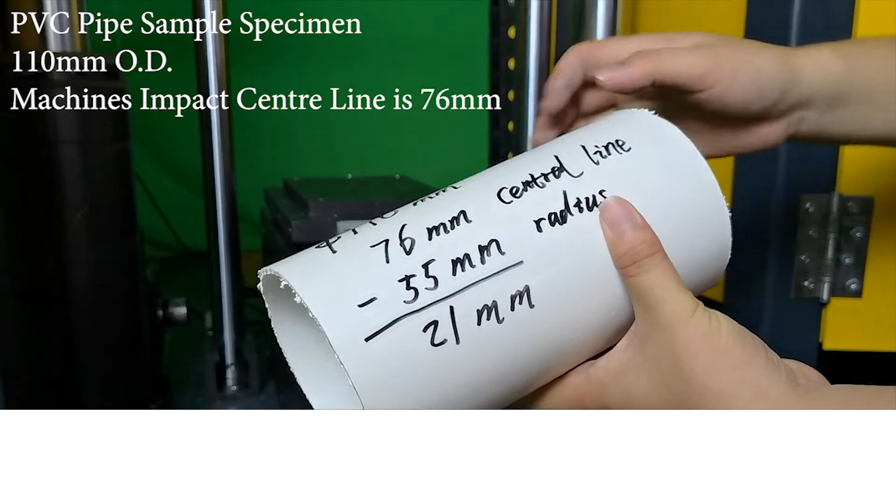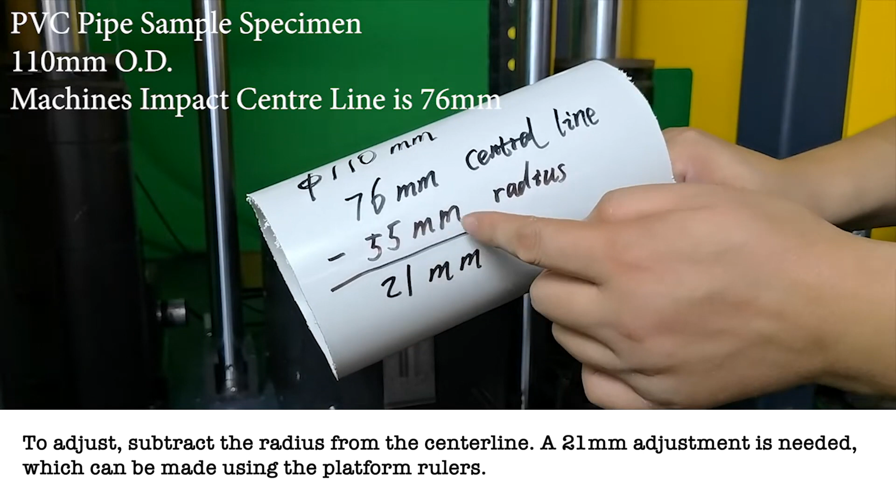PVC pipe sample specimen, outer diameter, 110 millimeters. The machine's impact center line is set at 76 millimeters. To adjust, subtract the radius from the center line. A 21 millimeter adjustment is needed, which can be made using the platform rulers.

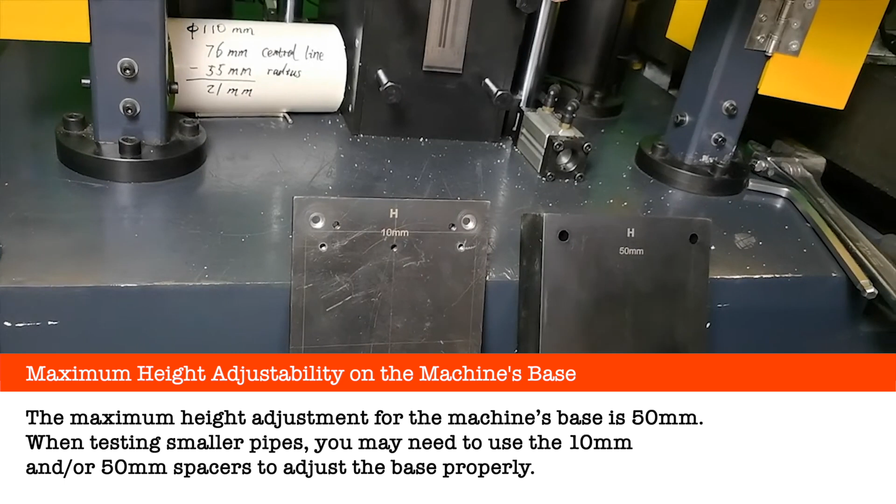Maximum height adjustability on the machine's base. The maximum height adjustment for the machine's base is 50 millimeters. When testing smaller pipes, you may need to use the 10 millimeter and/or 50 millimeter spacers to adjust the base properly. Base adjustment. Adjust the bolts to raise or lower the base.

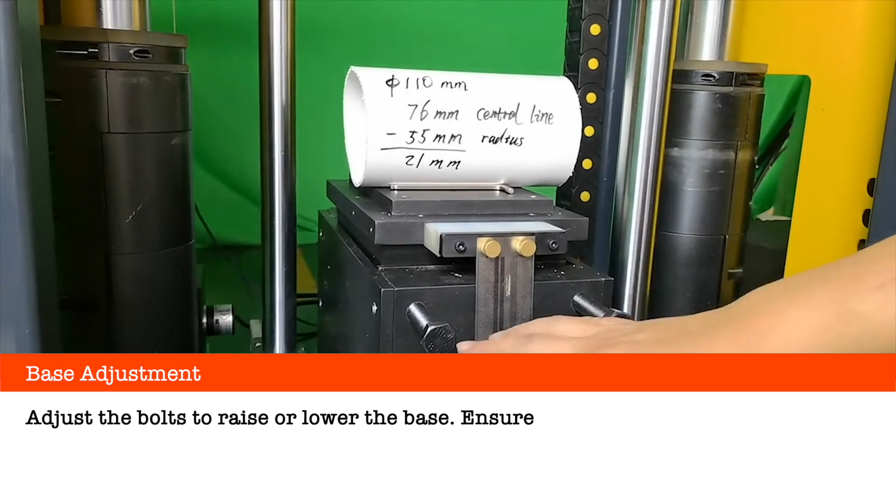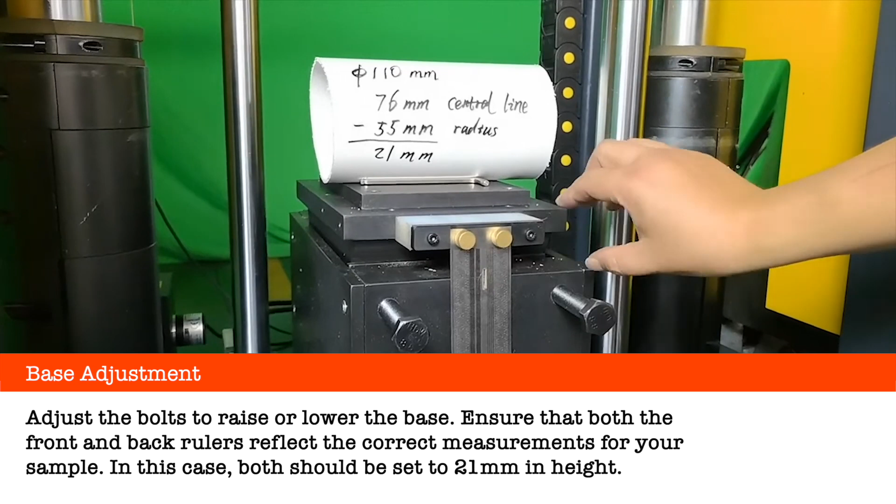Ensure that both the front and back rulers reflect the correct measurements for your sample. In this case, both should be set to 21 millimeters in height. Impact hammers and corresponding anvils. Various impact hammers are available, each with a corresponding support anvil.

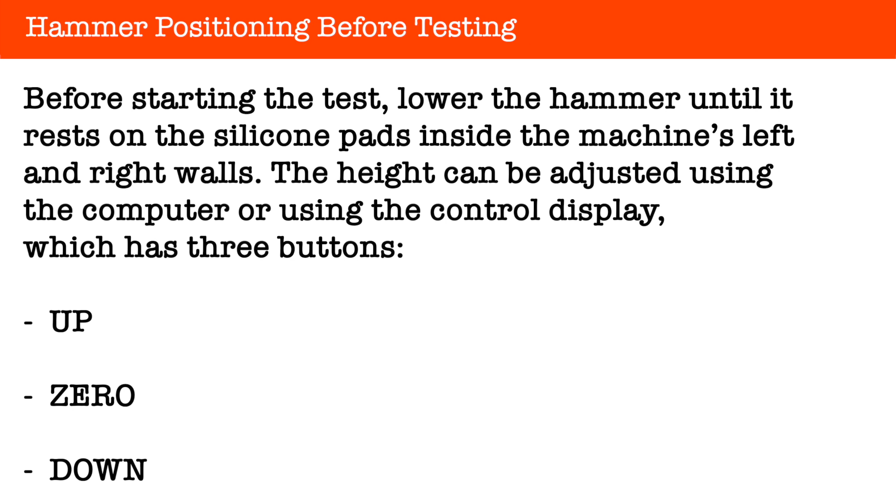Hammer positioning before testing. Before starting the test, lower the hammer until it rests on the silicone pads inside the machine's left and right walls. The height can be adjusted using the computer or using the control display, which has 3 buttons, up, 0 and down. Lower the hammer until it rests on the silicone pads.

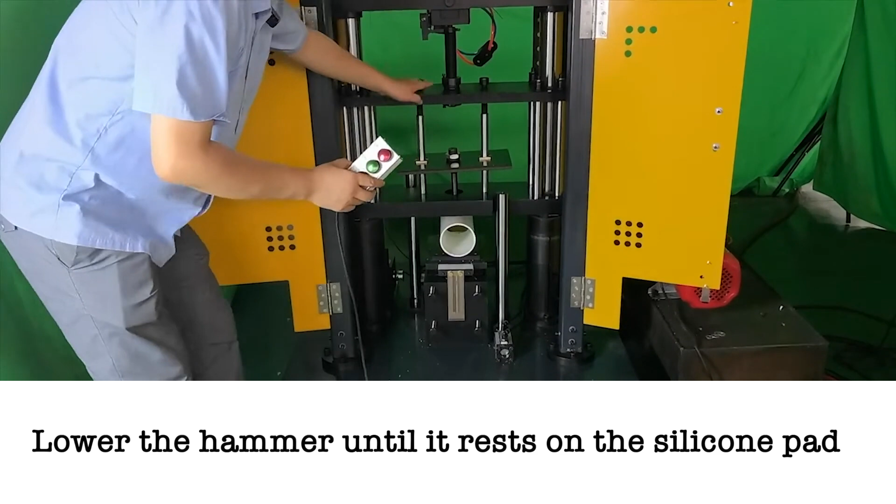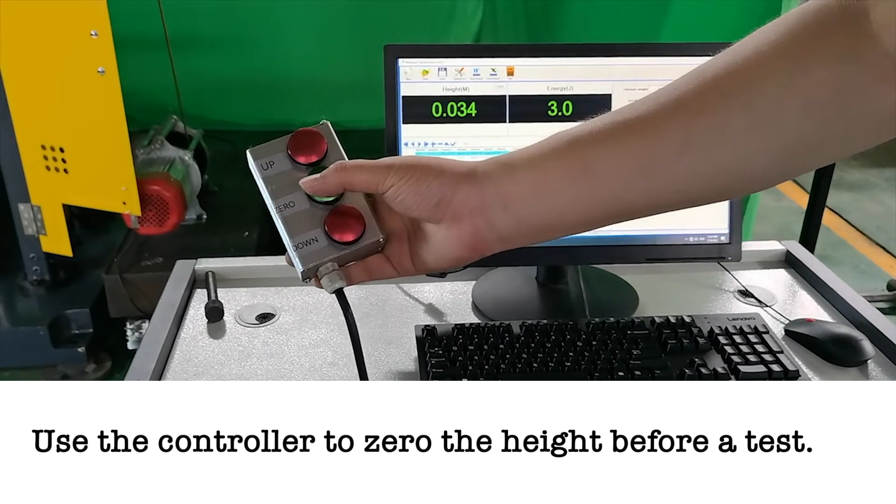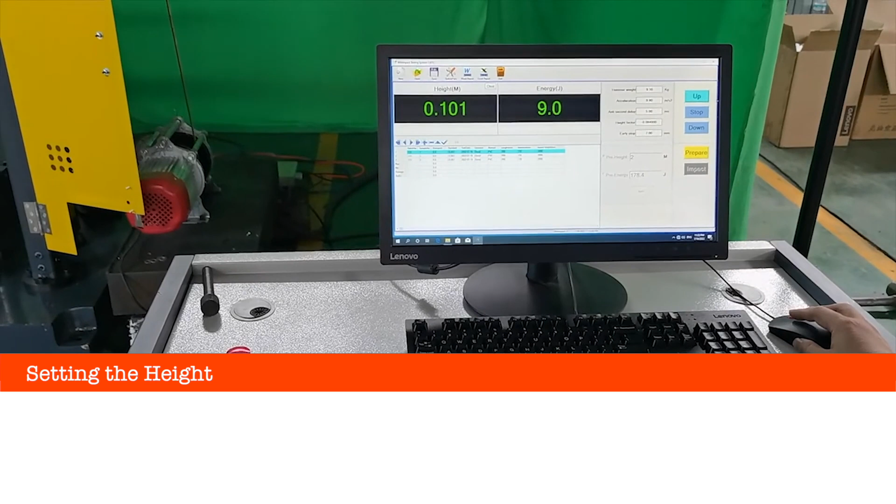Removing the safety pin. Use the controller to zero the height before a test. Setting the height. Preset the height on the computer, then press up. The machine will automatically rise to the set height.

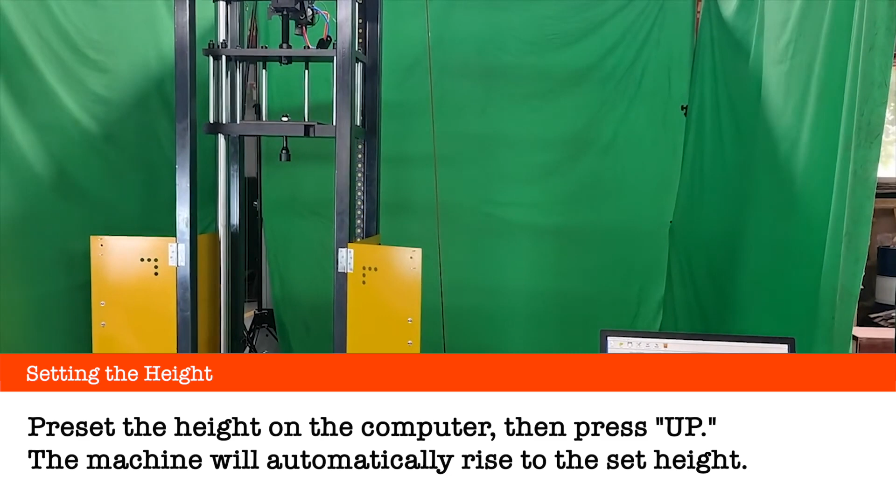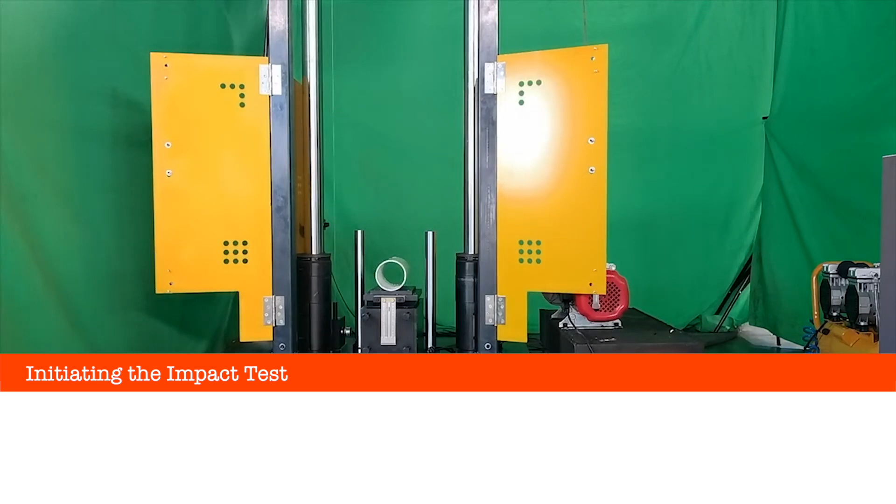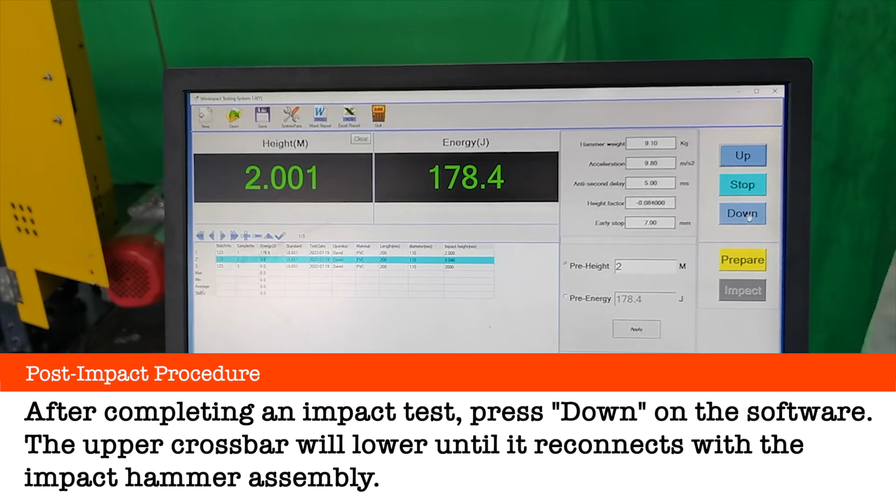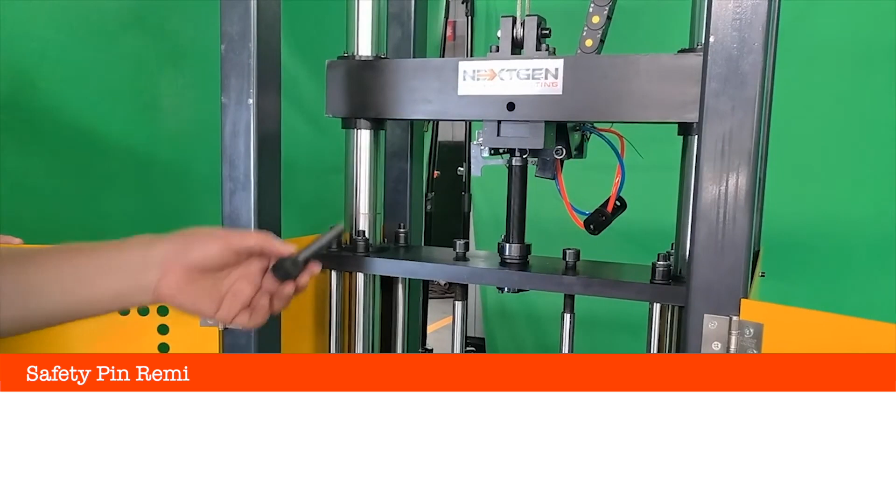Initiating the impact test. Before proceeding with the impact test, press Prepare on the software screen, then select Impact to start testing. Post-impact procedure. After completing an impact test, press down on the software. The upper crossbar will lower until it reconnects with the impact hammer assembly. Safety pin reminder. Always replace the safety pin before removing the sample or starting another test.

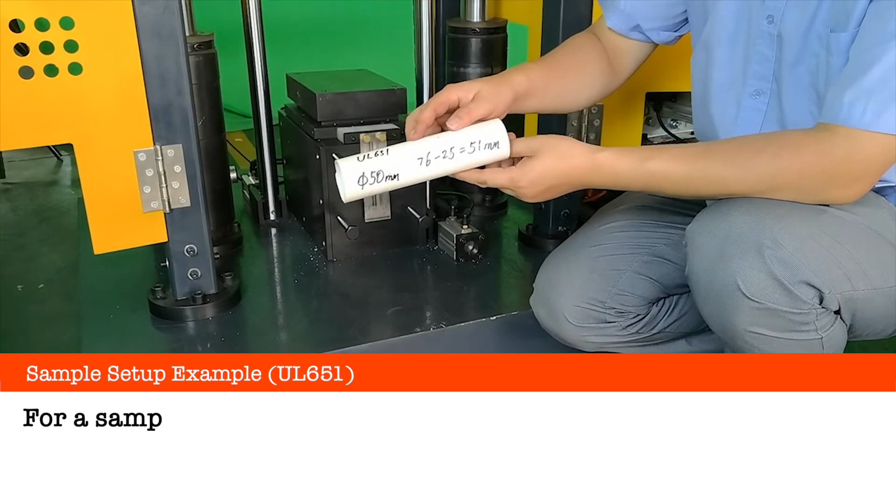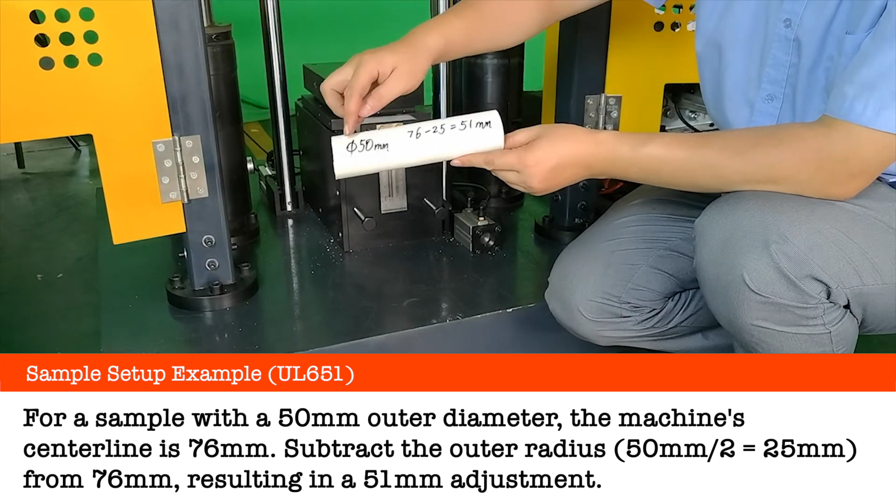Sample setup example. For a sample with a 50 millimeter outer diameter, the machine's center line is 76 millimeters. Subtract the outer radius, 50 millimeters divided by 2 equals 25 millimeters, from 76 millimeters, resulting in a 51 millimeter adjustment. Another example of setting up your sample according to UL651.

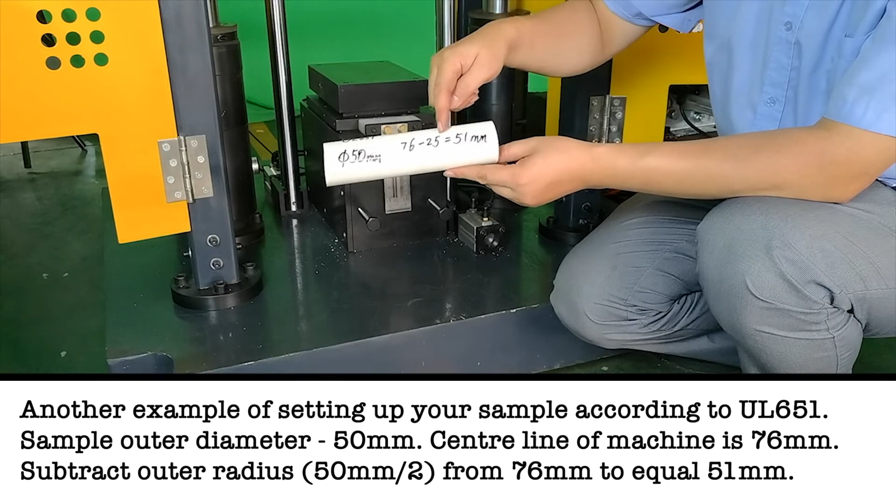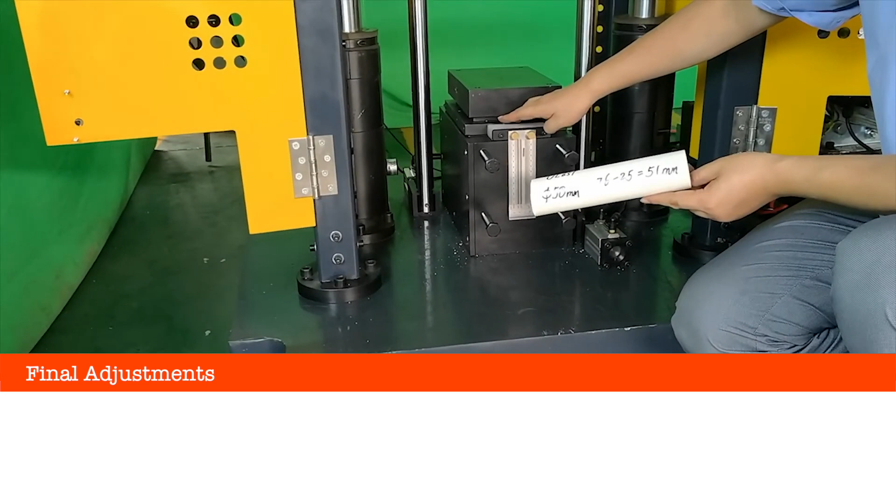Sample outer diameter, 50 millimeters. Center line of machine is 76 millimeters. Subtract outer radius, 50 millimeters divided by 2, from 76 millimeters to equal 51 millimeters. Final adjustments. Based on the previous calculation, the machine should be adjusted by 51 millimeters. Use the ruler to adjust the machine by 1 millimeter and add the 50 millimeter spacer base plate.